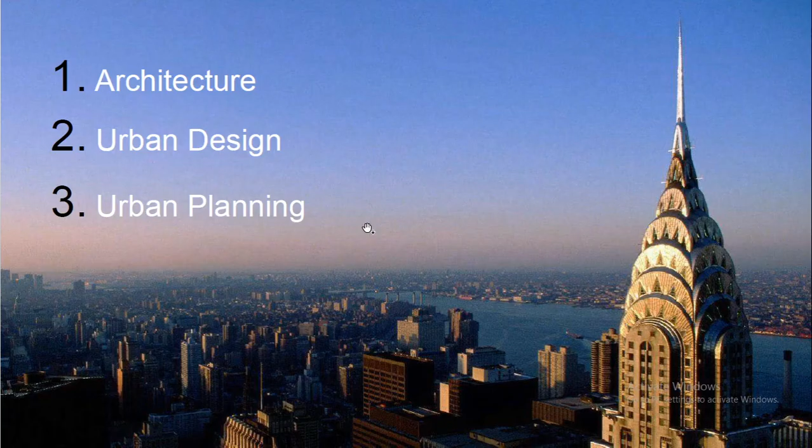So what are the different roles of these three different subjects? Architecture isn't just the reflection of the state of society, it's the reflection of the mind. It's the creation of human environments which are amicable and suitable to a given end user or group. So the art or the practice of designing and constructing buildings is architecture. We all know and practice it day to day.

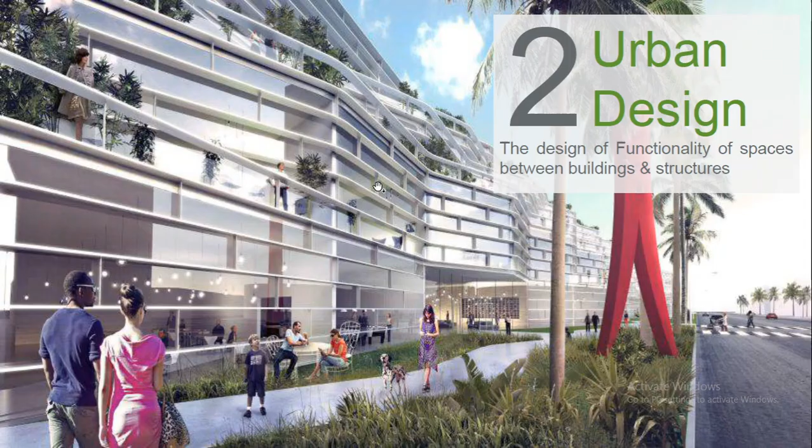Architecture takes three different characteristics: function, which is fundamentally to provide shelter, that is a cover or enclosure to a space; form, the art that is appreciated for its beauty; and then firmness, the stability of the structure. So it should be functional, it should have an aesthetic value, and should have the capacity to withstand. These three F's form the main role and scope of architecture and design.

So what is urban design? The design of functionality of spaces between the buildings and structures. In urban design, the perspective is not one space, it is many spaces. It is over a cityscape or townscape, an area dealt with at a macro level and not at a micro level. So a group of many elements in this macro space, such as buildings, the circulation pattern between them, the traffic movement between these elements, the usability of these spaces, and the connection from one place to another, and the way in which we perceive each of these spaces and direct it with some legibility and clarity in mind, forms the study of urban design.

So what is urban design? It is the making of places for people. So isn't architecture not the same? It's the same, but architecture is making a place for people, while this is making of places for people—the human interaction within the environment.

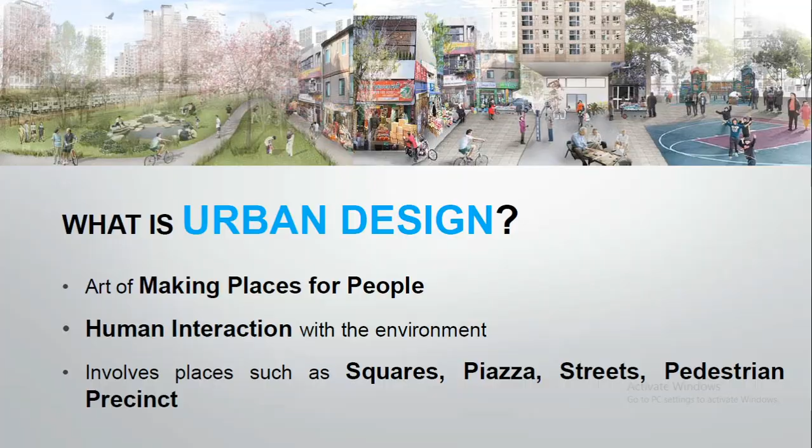It involves public spaces such as squares, piazzas, streets, pedestrian precincts, etc. A street is a spatial entity and not the residue between the buildings. It forms a continuous as well as sequential connectivity between many spaces interlinked to each other, forming a pattern such that the buildings are organized and suitably placed. It is definitely not placing the buildings and finding the residual space and calling it pathways or streets.

So the third subject of interest, urban planning, is the design and organization of the urban space and infrastructure. What is urban planning? The layout of the neighboring residential environments, cities, and regions, fulfilling the needs of the community and the economy, balancing the built and natural environment.

It deals with the location, organization, arrangement, articulation, and interference of many land uses such as residential, commercial, industrial, educational, institutional, and also open spaces such as agricultural lands, pastoral lands, landscaped areas, public domains, etc. So it is the layout, arrangement, and organization of spaces so that it fulfills the community as well as the economy of that space in a potential manner.

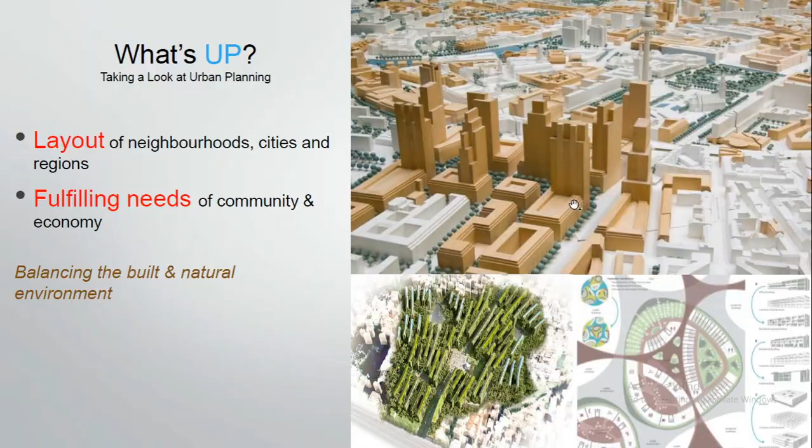If you can tell a man by his shoes, you can tell a city by its pavements. It's a very dramatic statement—when you look at how the pathways, the pavements of the city, the pedestrian crossings along the roadway are designed, you can say how rich and well designed the city is. So tabulating these three studies, architecture, urban design, and urban planning,

in the form of three parameters. One is the scale. So the scale is the individual building that we are talking about in architecture.

In urban design, it's the spaces between the buildings - the streets, parks and transit stops, etc. Whereas in urban planning, it's the neighborhoods, the districts, the city, the town planning we are talking about. So in architecture, when we deal with orientation as a scope or role of an expert, aesthetics and functionality is the role of an architect and an urban designer as well.

But when it comes to urban planning, it's the interlink of utility between the social, economic and environmental goals of the public areas. So in architecture, we treat a space in 2D and also in 3D. But in urban design, we deal only in 3D, that is an eye-level perspective of every space. In urban planning, we predominantly deal only with 2D because we are more concerned with earmarking of the spaces of utility value.

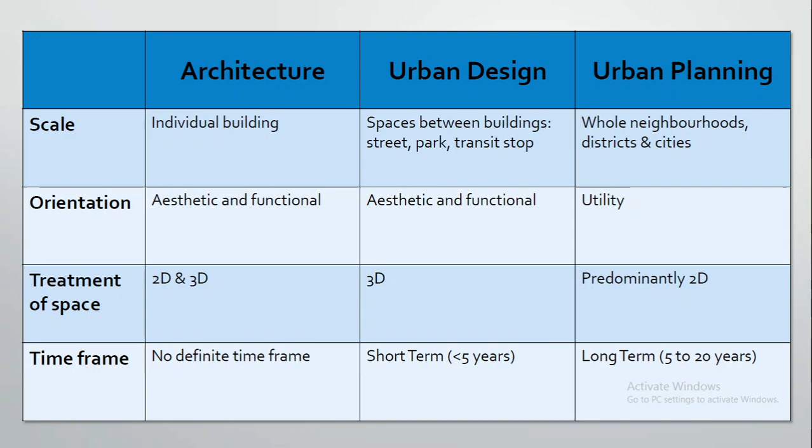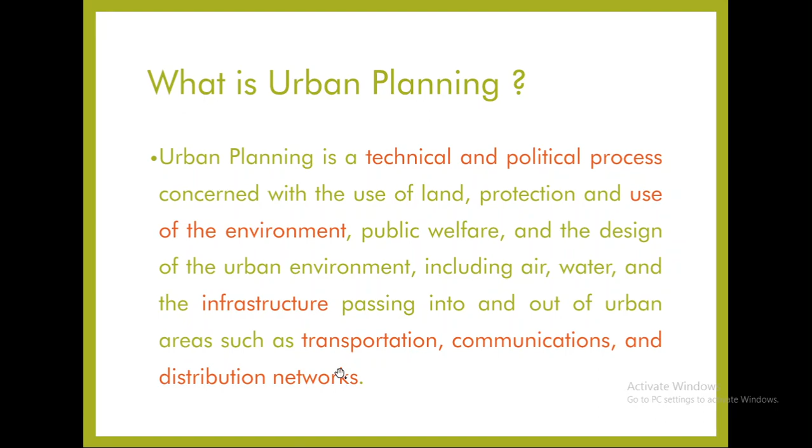What is urban planning? Since urban design and urban planning are a lot more interlinked with each other, we shall differentiate urban design from urban planning by knowing a little more about urban planning. Urban planning is a technical and political process concerned with land protection and use of the environment, and it deals with infrastructure planning, transportation, communication and distribution of networks.

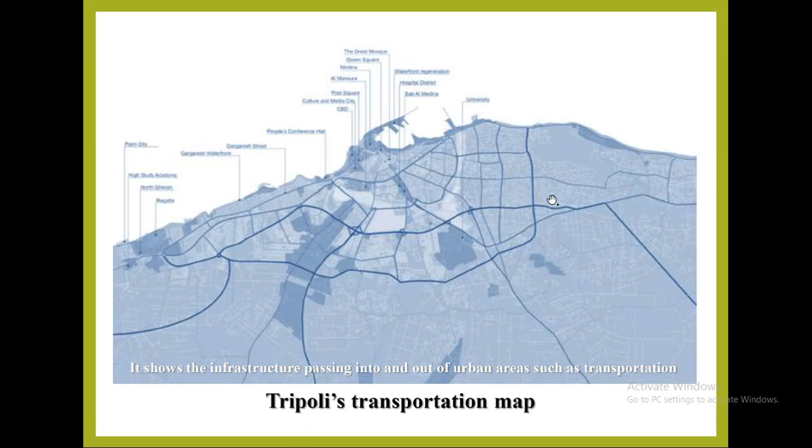So the transportation network deals with a web of connectivity, differentiating the hierarchy of the various roads that lead and penetrate like veins into the urban spaces. So this is the plan of the future of the urban areas.

So urban design deals with the look and feel at which all these spaces can be developed with a public functional space in between them - the avenue of roads, the treatment of the roads, the landmarks that need to be created, the nodes that differentiate the various roads leading to the legibility of taking orientation from one road to the other, at the same time maintaining the economic and environmental value of this particular space.

Planners work to ensure that cities have what they need to grow and prosper.

So what is urban design? Urban design is a process of giving form, shape and character to a group of buildings, to the whole neighborhood and the city. It is a framework that orders the elements into the network of roads, streets, squares, and blocks.

So urban design has various statements which define its role. It's the art of making spaces, it's the process of giving form and character to a particular space, the connection between people and space - so you connect with a particular cultural as well as visual aspect to that center using a landmark, and how buildings are scaled and oriented towards the road, so the legibility of finding the orientation of the road is well established.

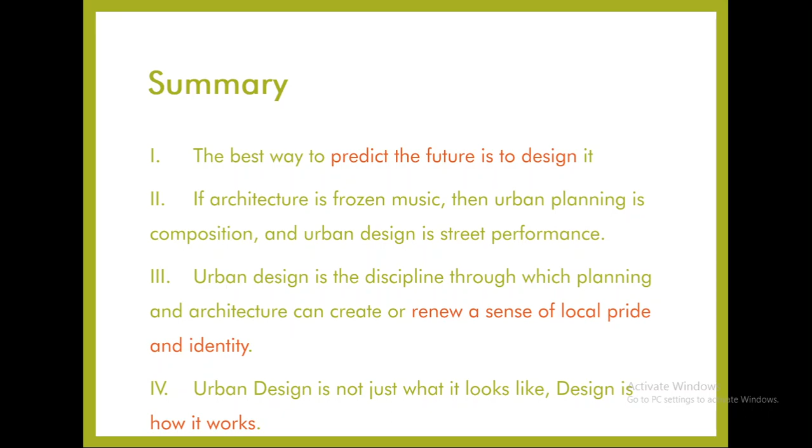Now that we have understood the relationship between architecture, urban design, and urban planning, we shall see what this study of urban design is into. Urban design is concerned with the arrangement, appearance, and function of our suburbs, towns, and cities. The way we feel all these places is what is actually urban design. It operates in many scales, macro scale to micro scale. In macro scale, the urban structure such as planning, zoning, transportation, and infrastructure networks; to the micro scale of street furniture designing, lighting, landmarks, and landscaping.

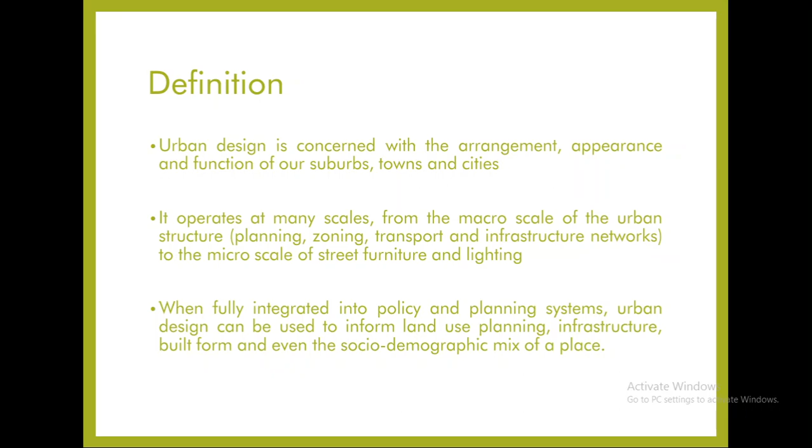When fully integrated into policy and planning systems, urban design can be used to inform land use planning, infrastructure, built form, and even the socio-demographic mix of a place.

So urban design is a process of designing and shaping cities, is what we understood from its definition. The public spaces, the whole neighborhoods, and the districts have to be designed in a way that the large scale is actually brought down to a small scale, which is tangible or touchable by a human. In the process, creating the localities where people live, engage each other, interact with each other becomes important. How they interact with each other is a location which we call a public space.

The interacting space or the commutable space is the transportation system, and the usable and utility-oriented amenities to these spaces are the services and amenities which add to it. The connection between people and places, movement and urban form, nature and built fabric, is what makes urban design very much essential in many strands of placemaking, environmental stewardship, social equity, and economic viability. It is important not only for making spaces, but to make it viable and economic, as well as it has to have racial and social equity among the public.

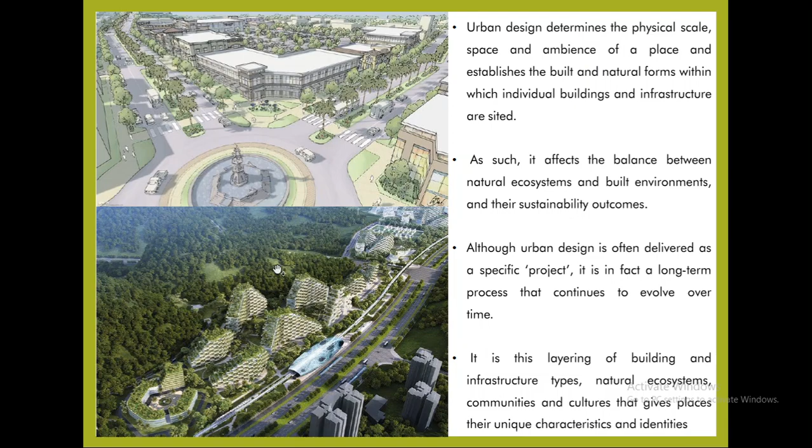So urban design is influenced by health, social, and cultural impacts, and how people interact with each other, how they move around, and how they use the spaces. So based on all this, how do we envision urban space?

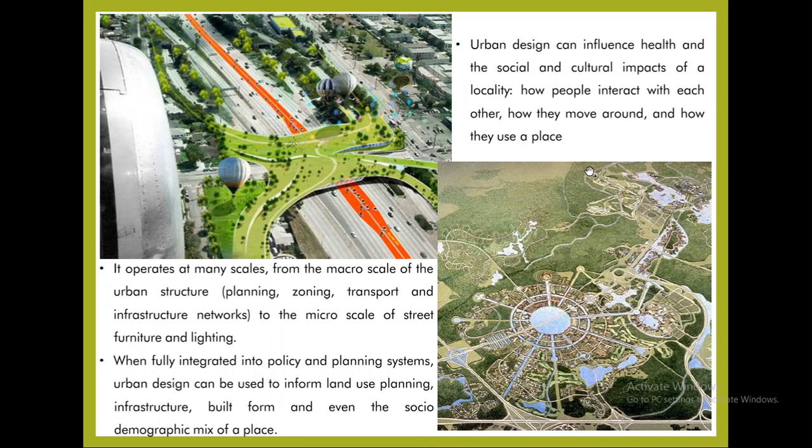The image of the city was defined by Kevin Lynch. He came up with this book called Image of the City, where he talks about a particular statement on page 46 which is very apt to urban design: the public image of any given city is the overlap of many individual images.

So how do we mismatch this gap? This is what he says in the Image of the City, and he lays down a lot of statements and definitions and concepts which we will be seeing in the following slides.

He was an American urban planner and author, and he has written 2 books which include The Image of the City and What Time Is This Place. He has done many other books, but these 2 are very important for urban design.

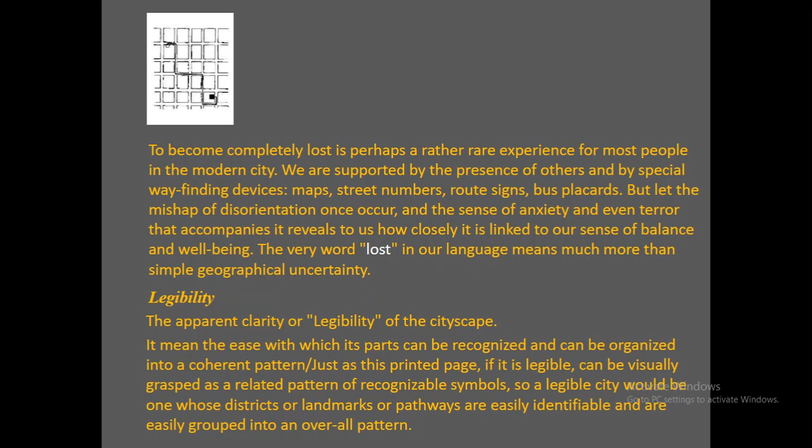How do you visualize this related pattern and recognize the way in which you have to adapt and identify the overall pattern? This, he says, is by pathways, landmarks, districts, and nodes. So the principles of effective wayfinding—he lists down some of the points.

Create an identity at a location, such as a landmark, an artifact, a roundabout, or a grotto. Use these landmarks to provide orientation or clues. This creates structured paths, paths that lead in a hierarchy of roads, such as the large roads, smaller roads, as well as the intertwining roads. Between these roads, regions are created.

When you navigate, you choose to use survey views such as the vistas. Vistas are nothing but visuals, so the regions create visuals. Some have low-rise buildings and create low vistas, while high-rise buildings are rarer. They use sight lines to see what is at the back and what is at the foreground. Also, wayfinding decision points, such as your direction finders, help in wayfinding.

Imageability is actually the quality in a physical object that evokes a strong image in an observer. That is, you have to awaken that image in the observer, so he creates mental images which are highly useful for him and which help him identify the vividness of the space, the shape, the arrangement, and the color.

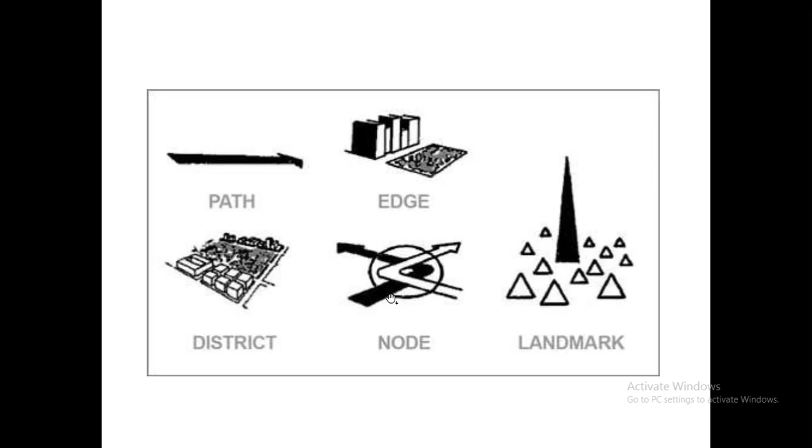So the paths are the channels. These can be defined as streets, walkways, transit lines, canals, or your railroads, or your metro lines, anything.

The edges are the linear elements which are not used as paths. They are shores, or they are railroad cuts, or they are mountain ranges, or they are the canyons, or they are the edges of development, etc.

The districts are from medium to large sections which the observer mentally enters the inside of and is recognizable as having some common and identifying character, a region of similar character which we call a city, such as a Coimbatore city, a Chennai city.

Nodes are points, strategic spots into which an observer can enter and which are intensive focal points or foci to and from which he is traveling, primarily junctions and concentrations such as these.

Landmarks are another type of point reference. In this case, the observer does not enter within them. They are external, usually rather simply defined physical objects, and they are signs, stores, or mountains.

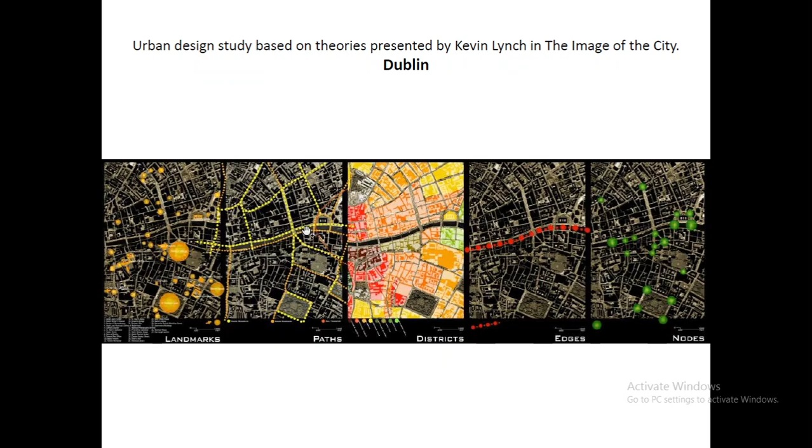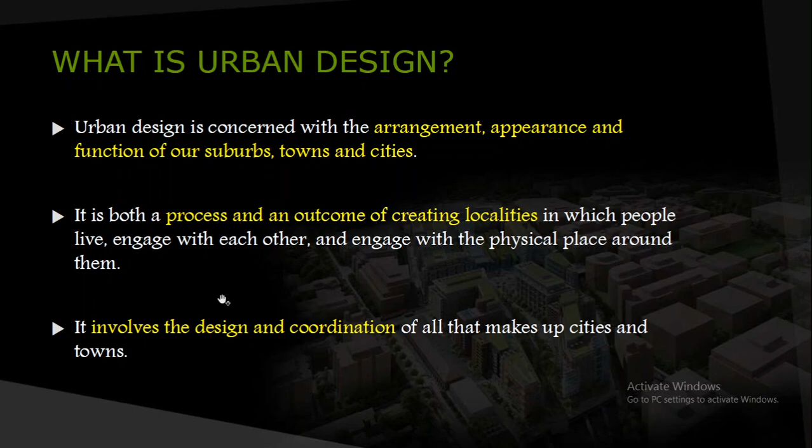So the elements of urban design. What are the different elements that make urban design? Urban design is the arrangement, appearance, and function of suburbs, towns, and cities. It's the outcome of creating localities, involving design and coordination of making cities and towns. Buildings, public spaces, streets, transport, and landscape all form the major elements of urban design.

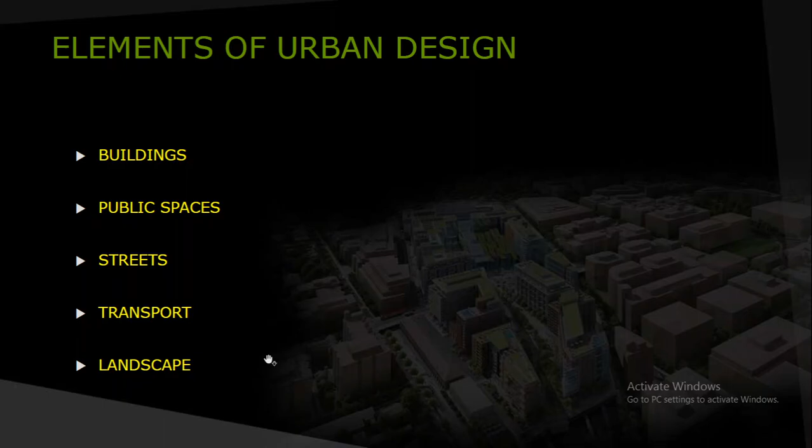Buildings, which we dealt with in architecture, the space between the buildings used for human interaction is your public spaces. The pathways that are circulatory forms between buildings form the streets, and the transit pattern or interaction pattern between buildings and public spaces is the transportation. The landscaping spaces, the lungs or breathable respiratory spaces of any city, all form the elements of urban design.

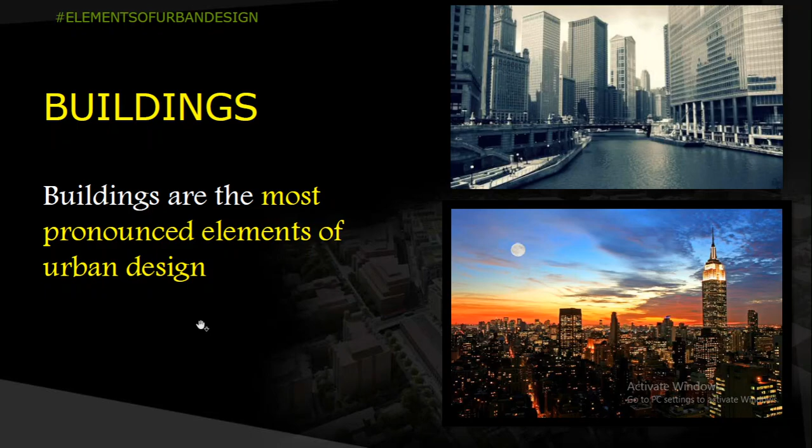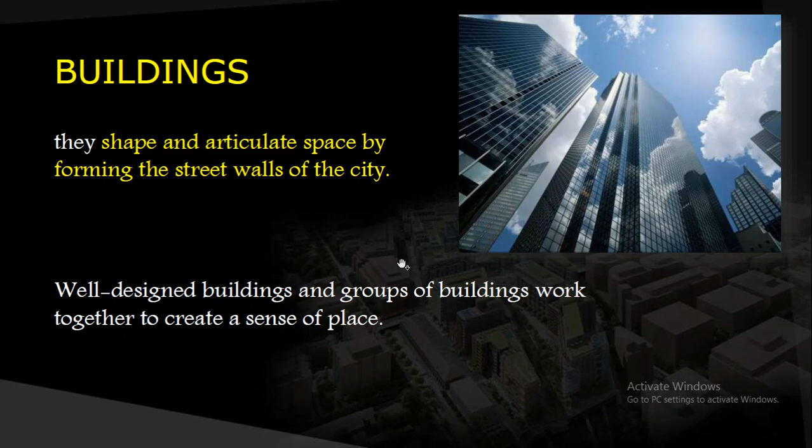Buildings are the most pronounced elements of urban design, the outcome of architecture. They shape and articulate a space, forming a street wall of the city. Well-designed buildings, the group of buildings work together to create a sense of place. They can be residential, commercial, institutional, educational, government, or industrial parks.

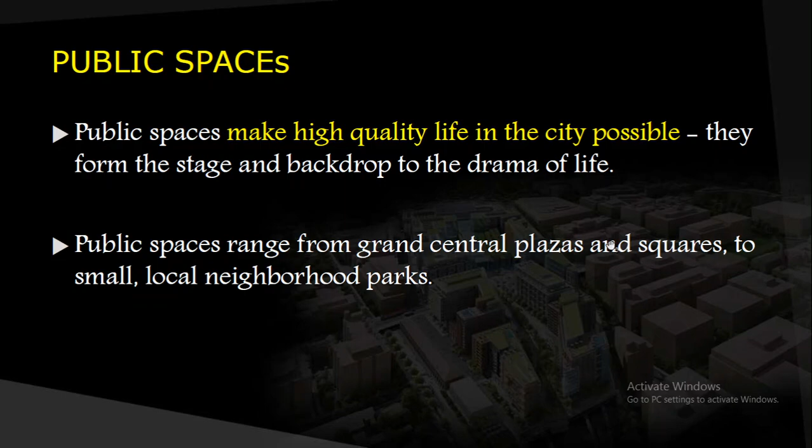The public spaces are the living room of the city where people come together and interact with each other. Public spaces add high value to the city, and also serve as the stage or backdrop of the drama of life. These can range from central plazas to large squares to small local neighborhood parks.

The streets, an element of urban design, are nothing but the connection between spaces and places. They give a physical dimension, character, and the size and scale defines what the streets are. The pattern of the street network is what defines a city.

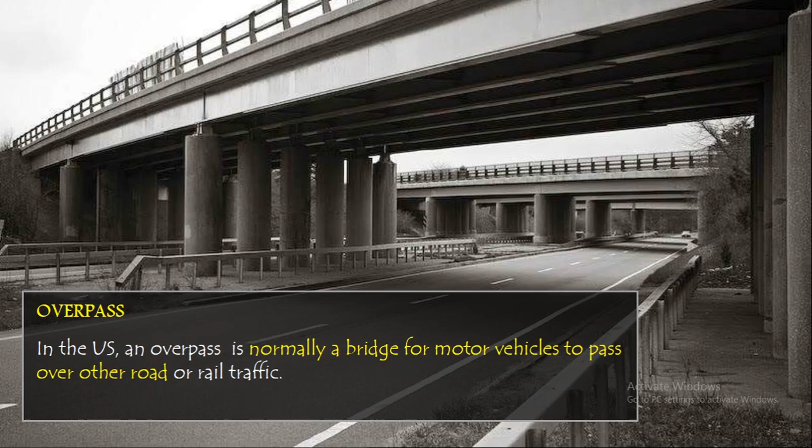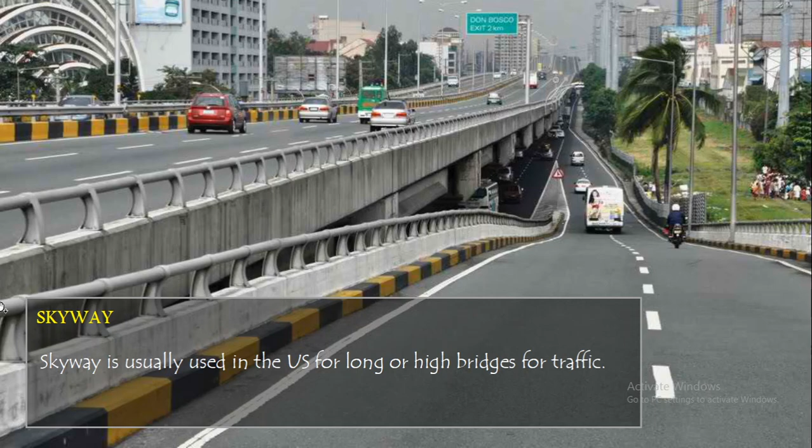The overpass is your expressway, with the underpasses and overpasses. The skyway is also an expressway to connect one place to another without great interruption. Here's an example of skyways. Freeways let you travel without a lot of hindrance to traffic, where you move freely with ease at great speed to commute from one place to another.

The boulevards are large roads running through the cities, multi-lane arterial thoroughfares with medians and centers for gatherings, some pedestrian pathways, parking lanes and bicycle lanes. Pedestrian usage and quality of landscaping and scenery are all part of boulevards.

Avenue roads are traditionally the straight route with large shrubs and trees on either side. The esplanade is nothing but the promenade where you walk and have a look at great scenery on one side. The alleys are the narrow passageway between buildings, also the narrow streets in front of houses and business areas. It is paved pedestrian, and often wall to wall between buildings.

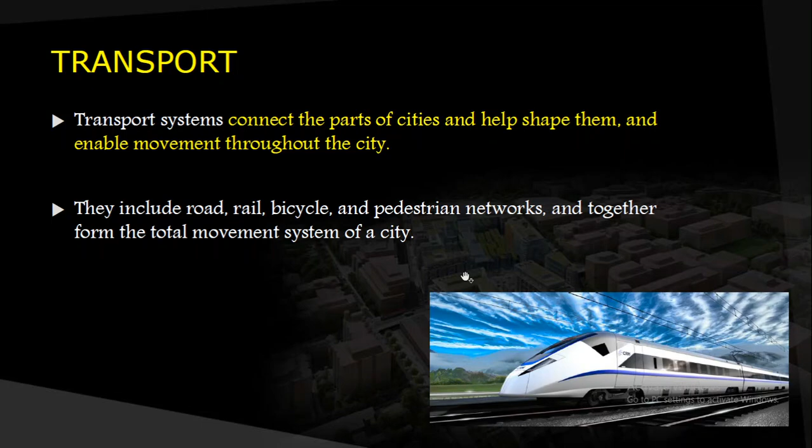Transportation connects between cities, connects between places, and enables movement, interaction, and commutation from one space to another. It makes it either friendly or hostile to pedestrians.

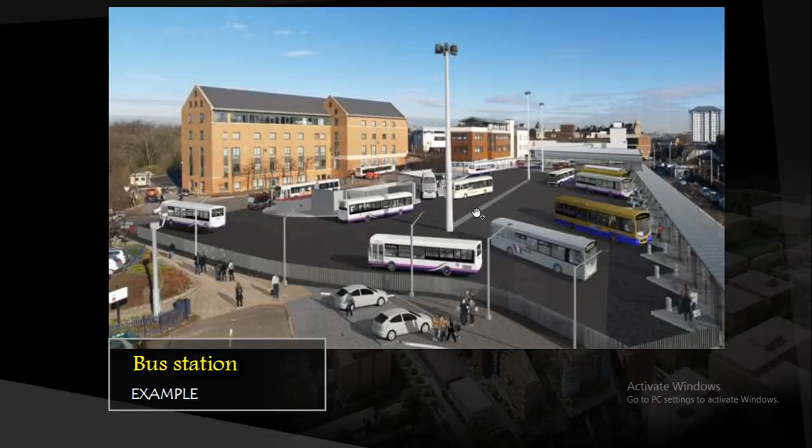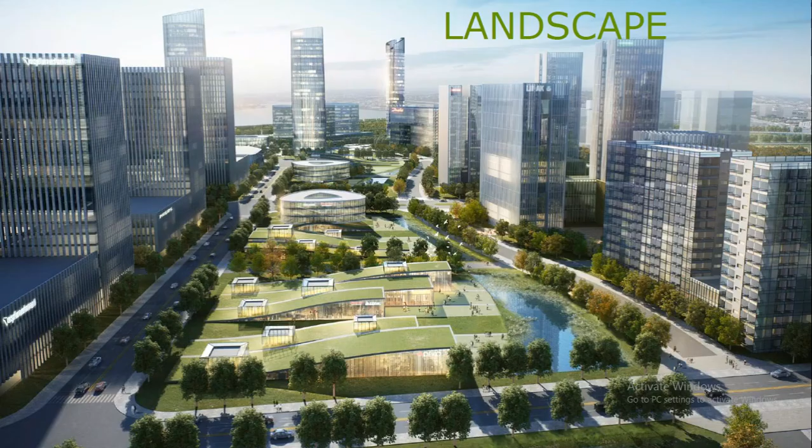Your roadways, your train stations, which are major nodes or landmarks as well, and your bus stations, your bus rapid transit systems, your taxi lines, then your rickshawalas, the paratransit systems, and private automobiles, your bicycle lines, the sidewalks, which are very essential pedestrian pathways, form part of your NMT, your non-motorized transport, and then your landscape.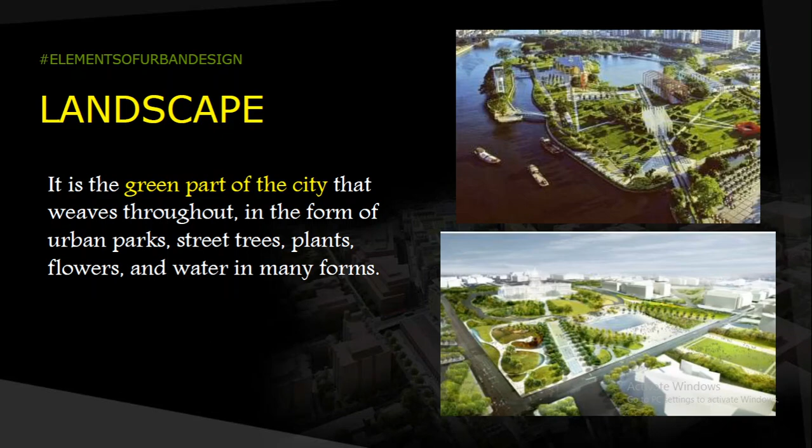Landscape is the green part of the city which weaves the form of urban parks, street trees, plants, as well as the ecosystem in many forms. The green spaces in the city range from grand parks to small pockets of strip parks within neighborhoods. Central Park is a great example of one of the largest parks in New York, a great place to live.

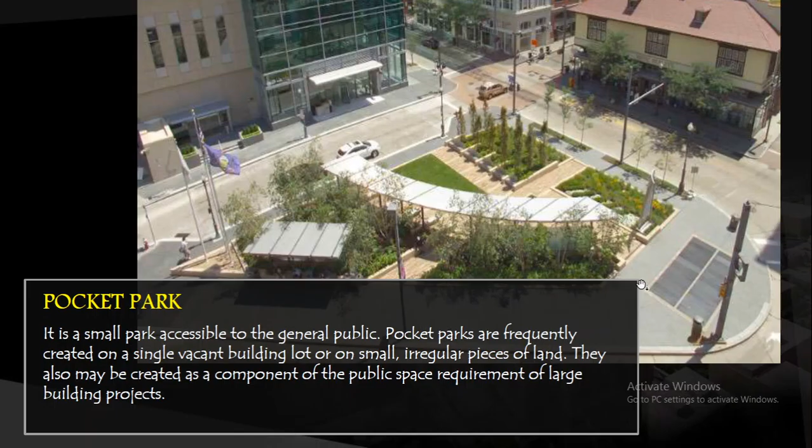So boulevards, the landscaping along your streets, the walkways, the lawns.

Urban design weaves together these elements and makes it a coherent, organized design structure. So the apt placement of these ingredients in the right place, at the right point of time, with the right use and proportion of these elements, leads to a good design.